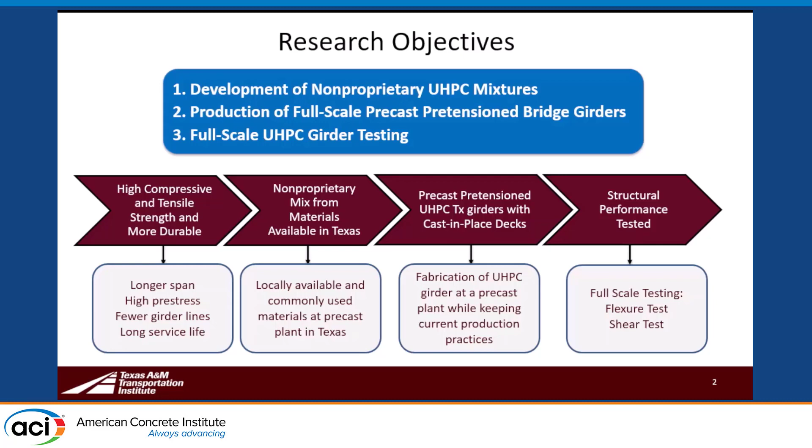The first thing was that they wanted to look into developing a non-proprietary UHPC mixture to reduce the cost of using UHPC for large members, and also to specifically tailor the mix towards high early strength concrete needed for pretension bridge girders. As part of that development of the mixture, we also needed to implement it into a precast production process, so we moved it from the laboratory to the precast plant, and then finally cast girders and tested them to look at the structural performance.

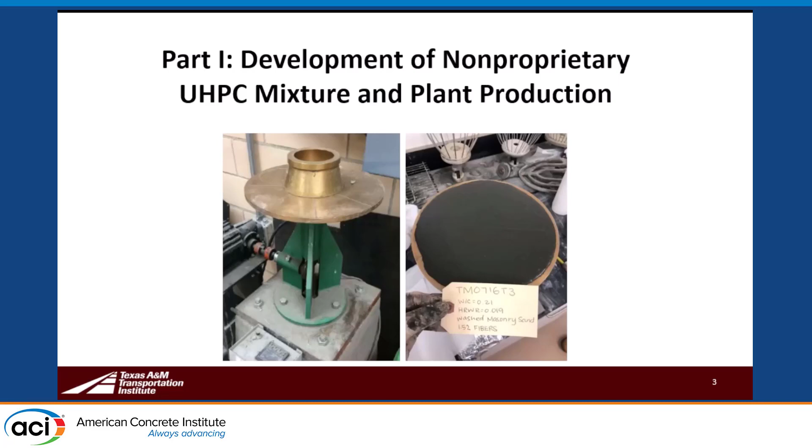Part one of this talk will focus on the production and development of the non-proprietary UHPC mixtures. Here I just wanted to point out that when looking at the workability of these mixtures, we are doing the slump flow tests, looking at the flow in terms of the diameter of the flow, similar to what you might do for self-consolidating concrete, but using a smaller volume slump cone, if you would like to call it that, on this brass circular plate. We're measuring slump flows on the order of about 9 to 11 inches typically.

In order to get started on this project, it was very wide open and we needed to narrow down a bit. So we looked into the industry input in Texas to see what kind of materials are readily available to us to produce UHPC. Some of the materials that were identified for precast concrete were type 3 cement, typically used in the plants for high early strength for these types of girders. Fly ash was available in Texas. They also pointed out there are different types of high range water reducing admixtures. They vary by plant, so that is one of the variables.

And then natural sand. In starting out in our laboratory mixes, we did start out doing some sieving of the sand and some oven drying, but when we got to the plant, we soon realized that is not going to be possible, so we had to look at the use of natural sand as it comes from the pile at the plant. Curing was another issue that we asked about, because the producers in Texas really don't need to use heat treatment and preferred not to have a situation where they're required to use it. So we looked at trying to do this without heat treatment.

Pre-stressing transfer also needed to be maintained within the first day to allow production to continue and turn over the precasting beds daily, and so the desire was to keep that at 16 to 20 hours for release after casting.

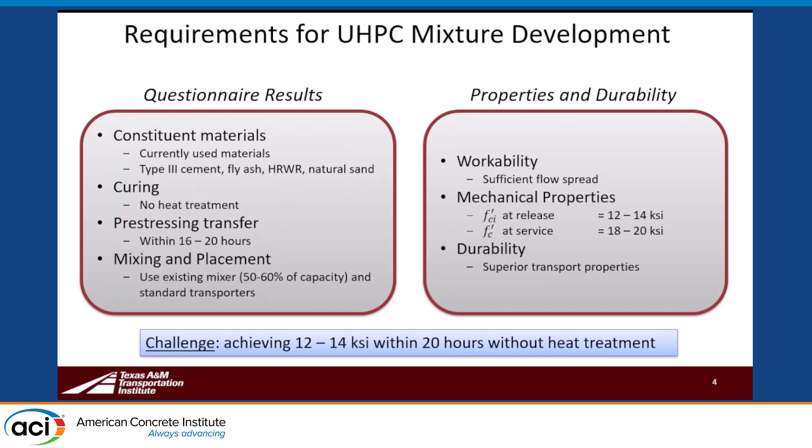I would say there's a very high cement content in our UHPC mix because of the high early strength we needed. However, as you'll see later, the service life is quite good, so there is some balancing in terms of sustainability aspects.

Steel fibers, this is something we looked into. We thought we would at least try to reduce the steel fiber content a little bit to see if we could make that work well in order to reduce the overall cost of the UHPC, because the fibers are a big part of that cost.

Based on some of the direct tension testing we did to compare, we felt like we could start with that 1.5% volume. Certainly you can use higher volumes of fibers and enhance the tension performance, but we were trying to meet some minimum requirements, and we were able to do that.

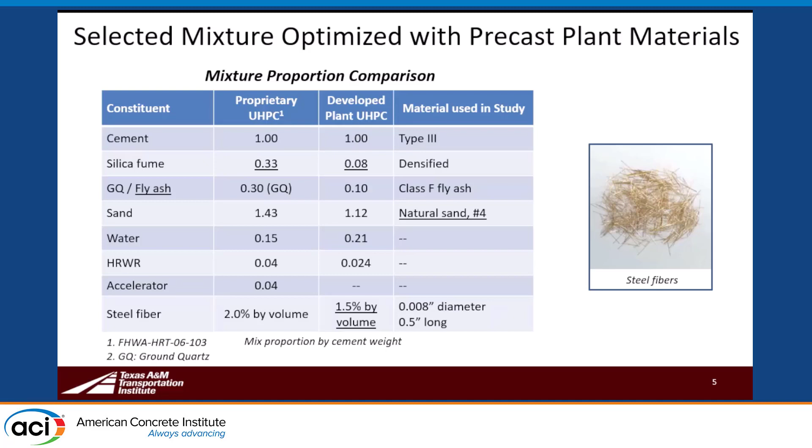So a look at the production of the UHPC girder in terms of mixing. We started out with a 3 cubic yard mix, so about 50% of the capacity of the mixer.

I want to just thank Heldenfels, which is a precast plant in San Marcos, Texas, that helped us out and allowed us to come in and mix UHPC in their mixers. That was a big ask, and so that was very nice of them.

As we get started, we're doing a dry mix of cement, silica fume, and fly ash. That's mixed for about 3 minutes, and then we move to the water addition for 2 minutes of mixing, followed by HRWR. So after about a total of 9 minutes, we started to see the turnover of the mix, similar to what we saw in the lab.

Then you'll see that we're adding the wet sand. There were some adjustments made because of the addition of wet sand from the plant, and we found that by adding it at this stage, after the paste had combined, it worked well. We did hold back a little bit of the cement because it is such a dry mix. We needed some of the water from the wet sand to combine with the cement, and we didn't want it to be too dry at the beginning as we initially added water. So that was the reason for what we call the tail cement.

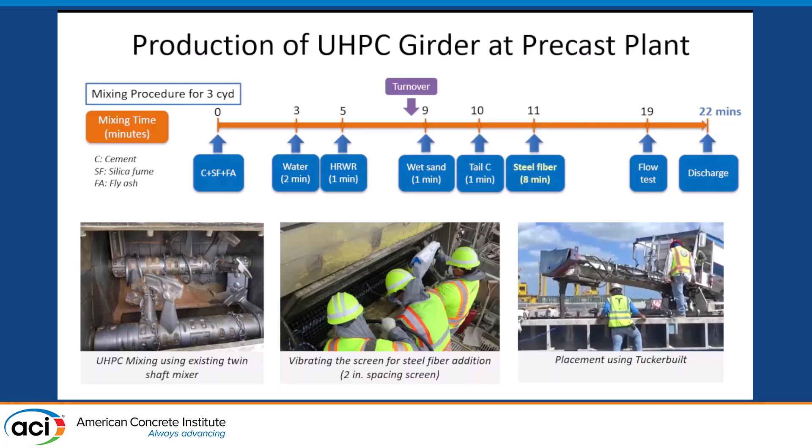After about 19 minutes, we conduct a flow test and double check the workability, making sure it's not flowing too much where we're worried about fibers settling, and not too stiff that it's difficult to place. Then this is discharged into a Tucker-built truck at the plant where they convey it back to the beds where the precast girders are being cast.

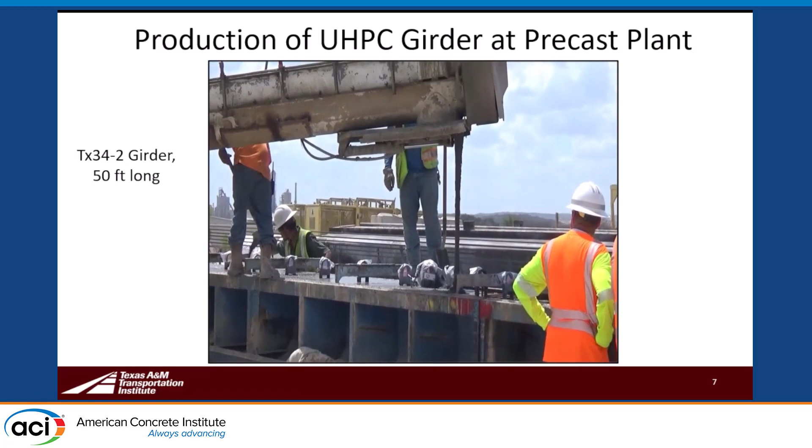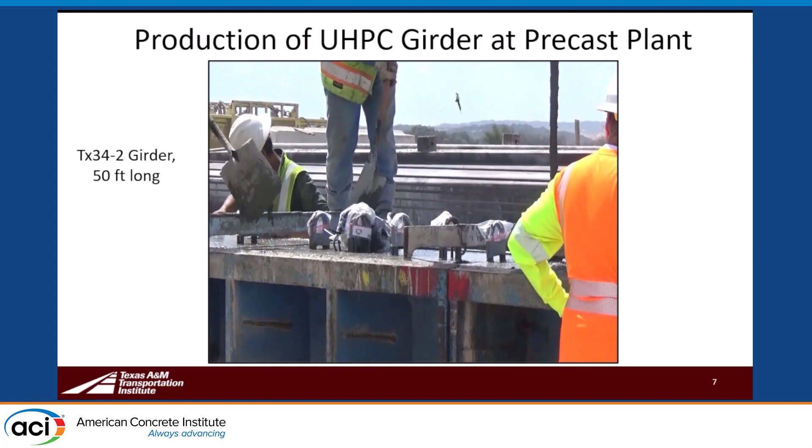This is a quick video showing the casting of our second girder specimen. You can see it's a very flowable mix. There are no coarse aggregates in this mix, so it's a very fine particle, dense, well-packed matrix that's designed to have very low porosity after it hardens.

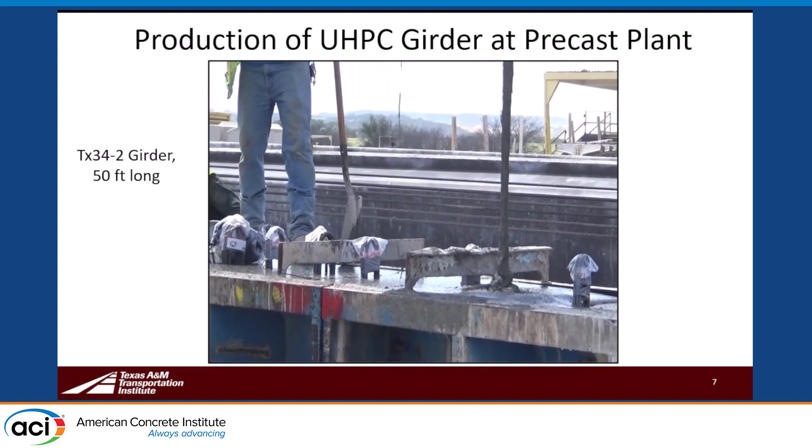As you can see, they're just topping off the girder at this point, and it's flowing down into some of the adjacent areas that were a little bit lower.

There are issues in terms of composite behavior that we looked at because the interface is quite smooth. We did try doing a little bit of roughening after the concrete hardened slightly, but we found that most of that just kind of scales off. There have been studies on other options, but you'll see a little later that we're using some steel reinforcement across the interface to provide composite action.

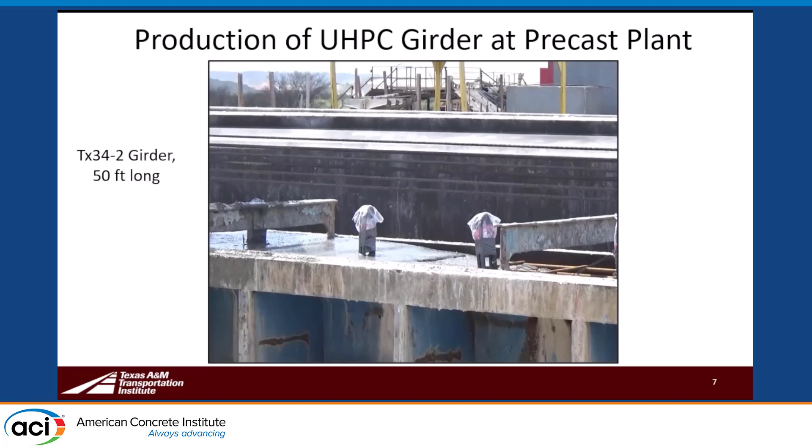So this is a look at compressive strengths. We did have a requirement at 1 day as well as 28 days. Looking at the various bars shown here, lab mixes in blue, red are the plant trial batch, Texas 34 and 54 are the girders we cast individually on different dates, and then we did a lab mix with a new cement being used at the plant after we cast the 54, to make sure in the lab we were getting similar results.

For 1 day, we're doing fine in terms of getting the required early release strength. Because of that high early strength, it's interesting that we're not seeing as much increase over time, but we are hitting the high early target and by and large hitting the target strength at 28 days.

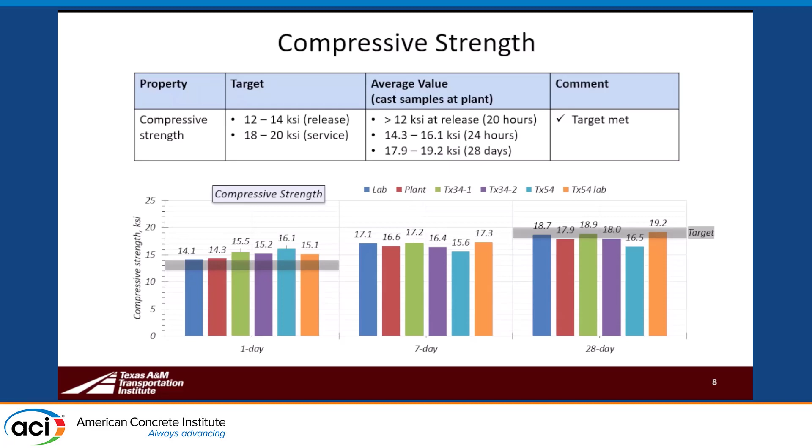We also had some additional hardened properties that we looked at, including elastic modulus. We compared the values from the MOE testing and found this is a little bit lower — it's not directly proportional to the square root of F prime C like we have in the ACI code. As we get into UHPC, it's a little lower, but consistent with the literature. We're in the range of 6,300 to 7,400 for our mixes, the various batches.

We did uniaxial tension strength testing. This is the direct tension setup recommended by FHWA, and I understand there's an AASHTO standard now for this test method. We also followed the inferred tension bending test setup, which looks at tension strength using a flexural bending test and also looks at ductility.

In the uniaxial tension test setup, we measure deformations as we do in the flexural setup. This middle test, the uniaxial tension test, is a little difficult — it takes a lot of practice and lessons learned because you're testing a concrete prism in tension, and sometimes it breaks outside the area where your LVDTs are located. What we found is that on average we were sometimes a little lower than our target strength, but individual specimens where we had a successful test were meeting the required strength. So we felt like we were getting reasonable results.

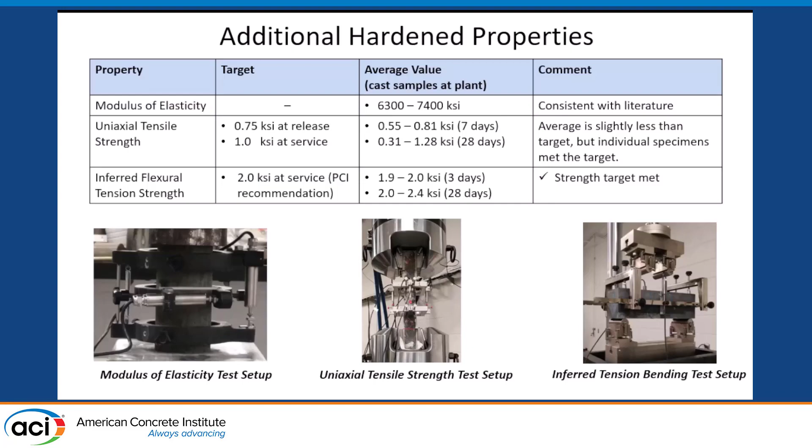As we look at other information here, durability testing — I have just a quick summary. We looked at resistivity testing, rapid chloride penetration tests, ASR, freeze thaw, scaling, abrasion resistance, and then at the end we did a service life prediction. What we found is that all of these measures came out very well for the UHPC. Very low resistivity, negligible chloride penetration, and all the measures from these standardized tests were what we would expect for UHPC for this type of material.

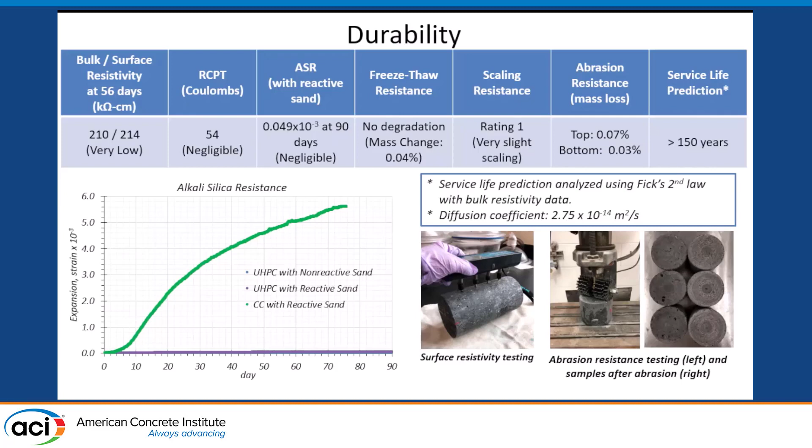This plot shows the expansion strain versus days for several mixes that were compared. The one in green is a conventional concrete with reactive sand, and the flat lines show the expansion of UHPC with both non-reactive sand and reactive sand. Because of the very little water availability, we're not seeing any ASR issues in this mix based on our lab testing.

We also looked at fiber distribution and wanted to see how well the fibers were distributed in our girder specimens. After testing the girders, we took cores through the web section, and these green rectangles show where the X-ray CT images were taken. We do see some different alignments of the fibers in different locations, but overall good distribution, perhaps with a little alignment in some cores depending on the direction of the pour.

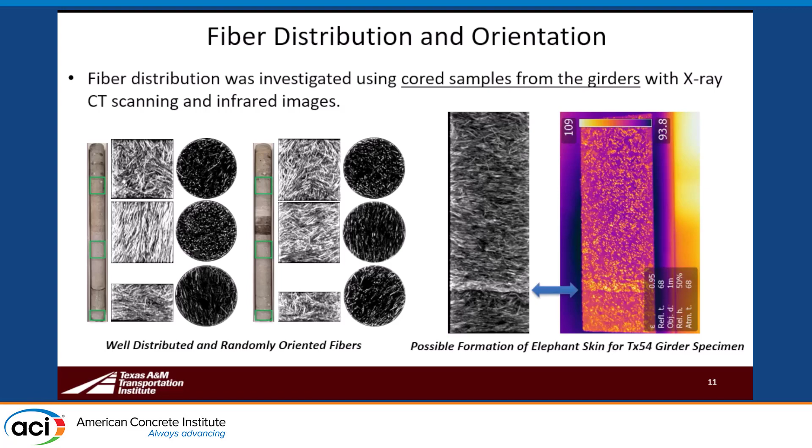The one on the right shows X-ray CT versus an infrared image of the same core, from our Texas 54 specimen. We had a fairly stiff mix on that particular batch, so we were adjusting to get the flow up a little, which took some time between that batch and the next. We think we may have had a little elephant skin formation, the drying of the surface of the UHPC that creates a thick skin, which may have led to some fiber settlement here. The good news is that when we tested the girder, we didn't see any issues resulting from this.

This is a cost analysis to wrap up the material side of the UHPC study. When we did a cost analysis back in 2020, we came up with about $600 per cubic yard. This compares well with other studies ranging from about $560 to a little over $1,100 per cubic yard. Proprietary mixes could be on the order of $2,000 per cubic yard, which may be okay for smaller volumes, but we'd be interested in bringing that cost down for something like a girder with a fairly large volume.

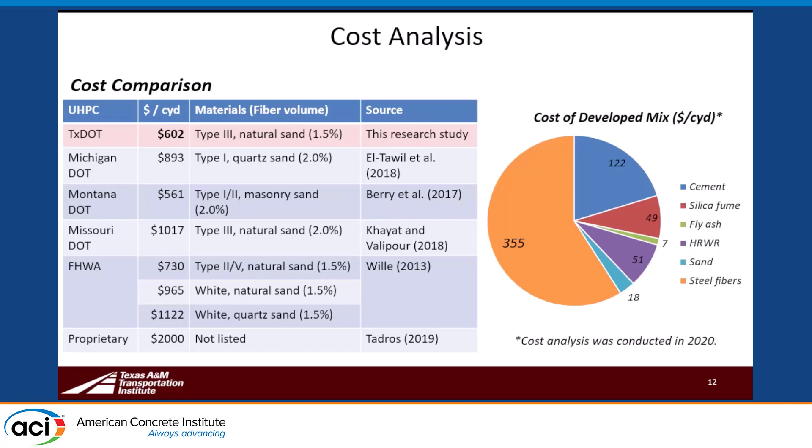That was what TxDOT was interested in. The orange part of the pie chart is the steel fiber cost, which is a big part of the total cost. If we wanted to go to 2% fibers, we'd need to increase that cost a bit as well. We're hoping there will be more fiber availability in the US. At the time of the research we had to go overseas for fibers, but I understand now there's more available domestically, which should help with the cost competitiveness of UHPC.

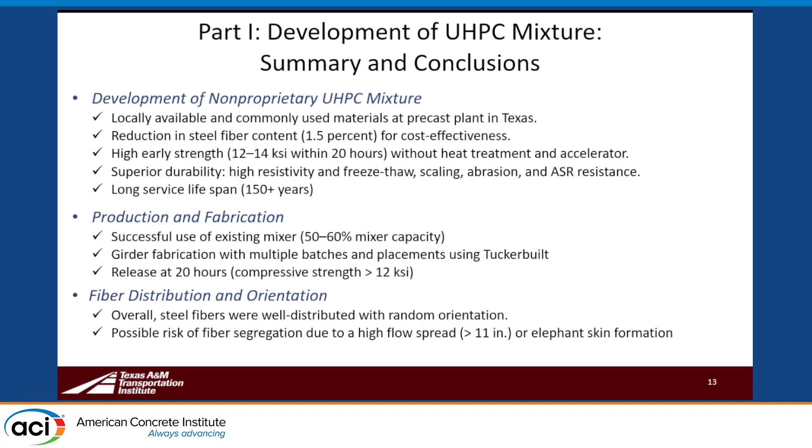This is a summary of some of the things I highlighted, but mainly I want to emphasize that we were able to develop a non-proprietary UHPC mixture that could be used, and we've been working with precasters to implement that into production and see how that works. They have a lot to think about in terms of implementation, but so far we've at least proven we get some good results with the girders we've cast.

This is a look at the structural full-scale testing, our Texas 70 girder in our high bay lab at Texas A&M University. It's filling up a good part of the lab's length, so it's a little hard to appreciate the size, but that's 70 inches deep, almost 2 meters, along with an 8.5-inch deck.

One of the things we wanted to do, TxDOT's desire was to look specifically at the girder being UHPC while keeping the deck the same as what they typically use now. That meant we needed a conventional concrete deck on that girder so we could really understand the performance in the field. As we move forward, there may be ways to make that section and the bridge even more efficient with UHPC, but this is the first step we're looking at.

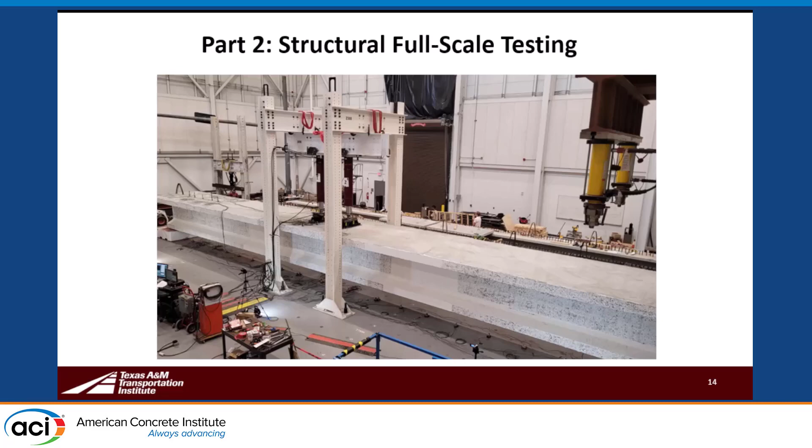So here are 3 girders that we cast at the precast plant, and then we added the cast-in-place deck in the lab. We have a Texas 34 - it's a little hard to see, but all the strands on this are straight strands through the bottom flange.

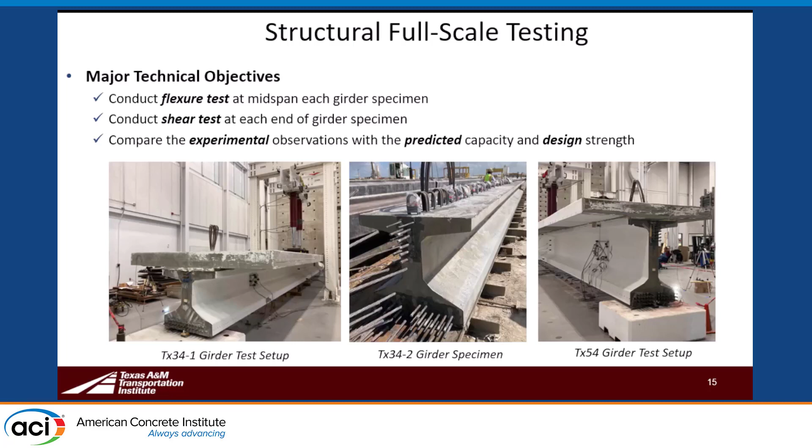We also have a Texas 34 with some harped strands, and a Texas 54 with harped strands. All of these were tested with a deck, and we looked at each one with flexure and shear, so we had 3 total tests, 1 shear test at each girder end. I wanted to highlight some results from the Texas 54 girder today.

This is a set of cross sections of the girder along with the elevation view, so you can get an idea of what the harping looks like in the 54-inch girder, as well as the shape of the section. Again, this is an I-girder shape that's used in many of the bridges in Texas and similar to other states.

We do have some harping - it's just 8 strands out of 48 total. The specimen span, bearing center line to bearing center line, is 68.5 feet.

But the loadings we're mimicking are based on a full-scale design of about a 120-foot span. One thing I want to point out is that on one half of the span, we do have some web reinforcement, which are called R-bars in the Texas standards. Those R-bars usually come up and become part of the composite interface shear steel.

Because we went to just minimum reinforcement here, that's 24-inch spacing, which is not as closely spaced as typically done in conventional girders - that might be more like 6 to 12 inches.

So we are supplementing that with what we're calling UC bars. These UC bars are 180-degree hooks that on one half of the span we're adding 2 of those to each R-bar. At the other side, we don't have any R-bars or web mild steel, but we do have these hooked bars in bundles of 3.

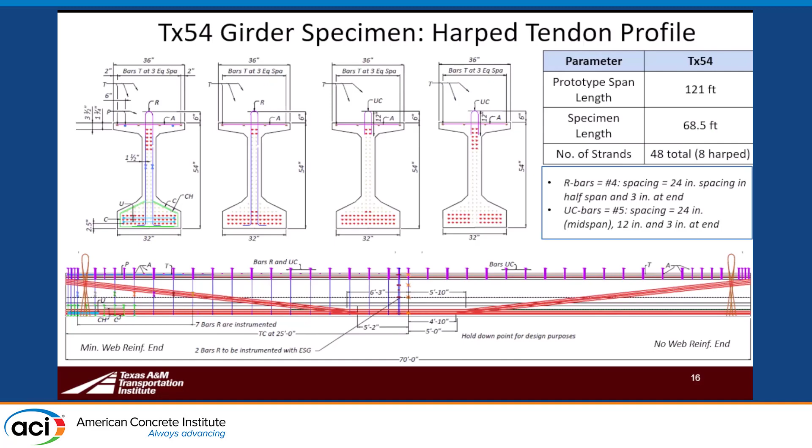So we're trying to put in enough strength for interface shear transfer, and they're spaced far enough apart to help with the casting. So just a few highlights of the testing.

We tested in flexure, which meant that we were loading at the center of the girder. We have a chart here showing the total load, so that would be each actuator added together - we're going up to about 800 kips total load.

We have a black dash line, which is our predicted performance, and a blue solid line showing the experimental values that we're measuring. The horizontal lines are showing decompression, service demand, cracking, and factored demand.

We did see the first sign of a flexural crack just above factored demand loads, so we felt like that was a pretty good outcome - up to factored loading, we did not see any flexural cracks forming.

As we continued on up, we see the green dash line, which is our nominal value from our code prediction, and then we kept going beyond that. It's a little hard to see the photo here, but the cracks are very tiny, distributed cracks that we're reaching at this high load, well beyond the factored load.

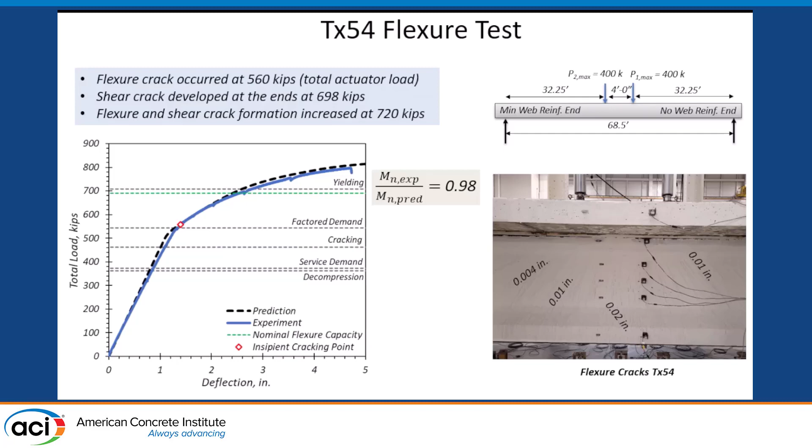For shear, we have 2 shear tests, 1 at each end. You can see in the schematic here we're moving to the minimum web reinforcement end to test, and we actually loaded up to 460,000 pounds per actuator at that end.

That gives us a total shear of almost 800,000 pounds across that web as we went to the maximum loading. We did get some cracks, of course, as we got to those high loads - we were trying to see how it was going to fail.

As we get to this point, it's starting to bend over. We probably could have gone a little bit further, but we wanted to test the other end without having to put in an internal support.

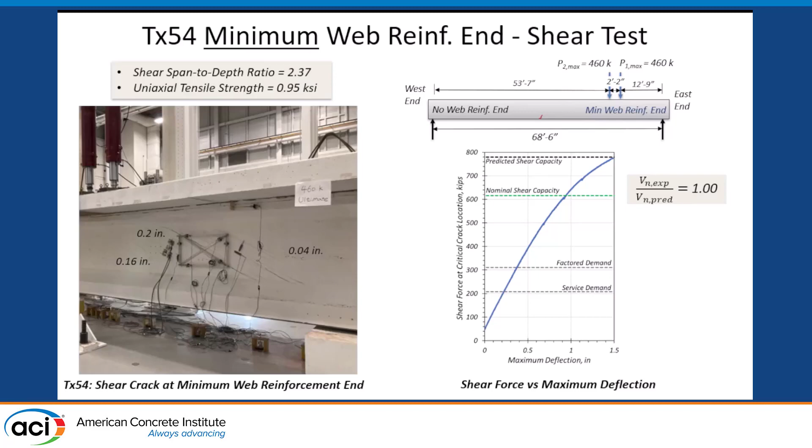So again, we were able to predict very closely the expected shear capacity. I just want to note that the factored demand is way down here - the service demand is about 200 kips, and so we got up to almost 800.

So when we had the case with no web reinforcement at the end, it's also similar that we're reaching close to 800 kips. We're missing a little bit of shear reinforcement, so we didn't get quite up to that same value. But I think you'll see that the crack looks a little bit more dramatic there, and I can tell you from being in the lab when it was tested that it doesn't give you as much ductility when you don't have the shear reinforcement. So there are some benefits to that minimum shear reinforcement being in the web.

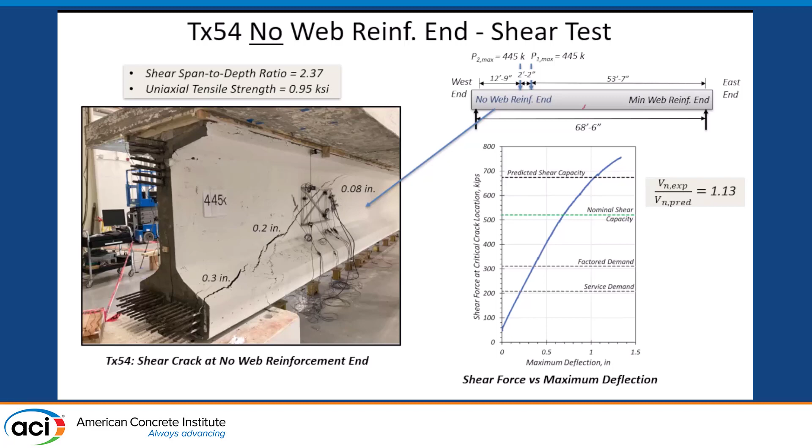And me being a little bit conservative, I kind of like having it there. But clearly we are getting some very high strengths even without it.

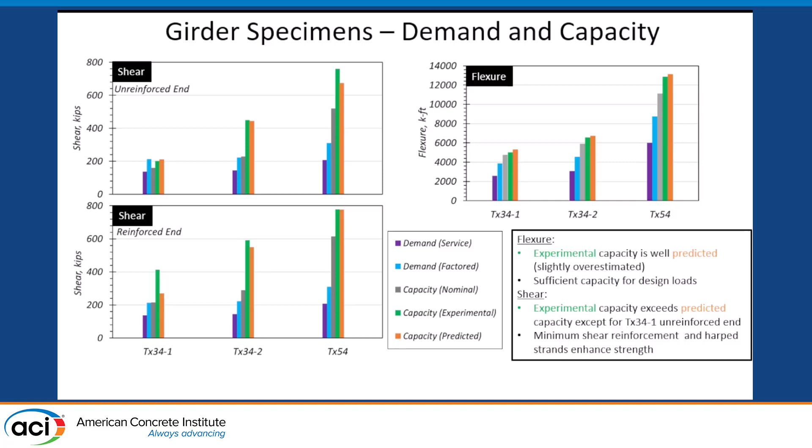I would say that it helps to have the direct tension test results. Of course, you could have a qualified mix where you at least have an expected tension value. That would help you with that. And then some of these other values are just the service, the factored load demand, and then the nominal capacity, which is essentially based on the AASHTO guidance that's coming out right now for UHPC.

So again, just to wrap up, I think in our design investigation, wasn't able to share too much about that, but we were able to show that with UHPC, we can take the same cross sections and make longer spans. We can maybe take out an extra girder and have more load per girder. So there's ways to make the superstructure more efficient with this higher strength material. The durability is also very beneficial in looking at service life.

In terms of the structural performance, flexural performance was quite good. We did not see cracking up to factored demand. And then we also were able to get some additional reserve capacity. Shear performance was also, I think, quite good. It was interesting to finally get a chance to check this in full scale at the end of this project.

And finally, our composite action worked well in terms of the interface steel that we provided there. We saw just a little bit of slip that happened after factored loading, but that was, I think, just a little bit of the release at the interface rather than any kind of structural problem.